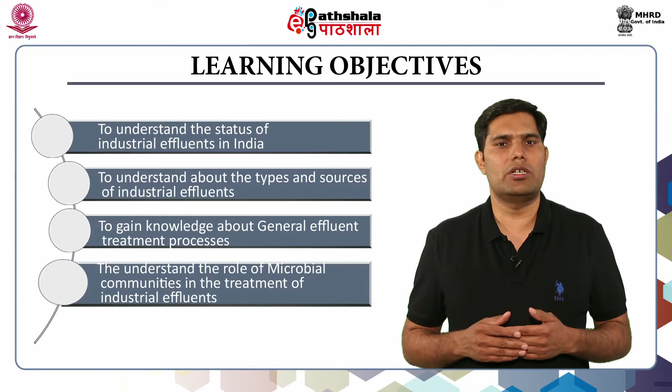Effluent or wastewater is polluted water that contains harmful liquid, solid or gaseous compounds, which may lead to contamination of surface or underground waters. It is estimated that in India about 13,500 million liters per day of industrial wastewater is produced, and only about 8,000 MLD is treated in existing effluent treatment systems. Hence, only 60% of effluent is processed and the remaining 40% is not processed due to lack of adequate effluent treatment facilities.

There is a large gap between the generation of effluent and its treatment. Remaining wastewater directly goes to natural water resources and causes negative effects to the ecosystem and human life.

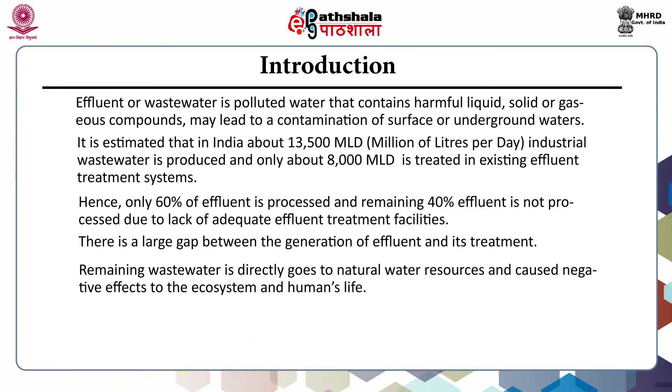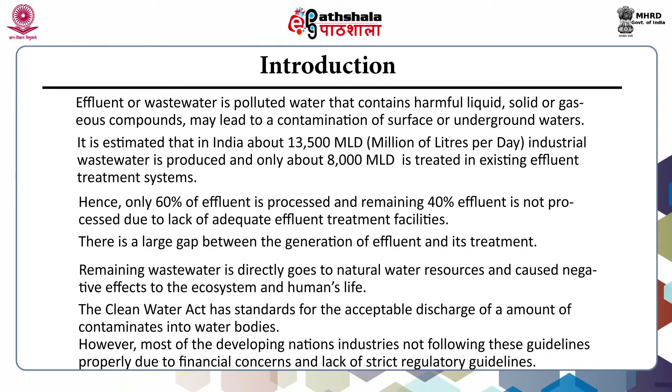The Clean Water Act has standards for the acceptable discharge amount of contaminants into water bodies. However, most developing nations' industries are not following these guidelines properly due to financial concerns and lack of strict regulatory guidelines.

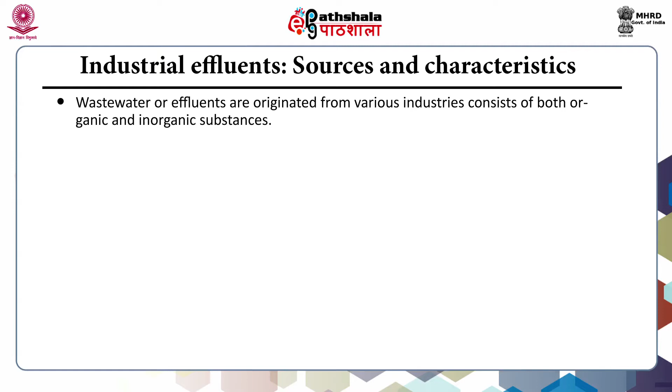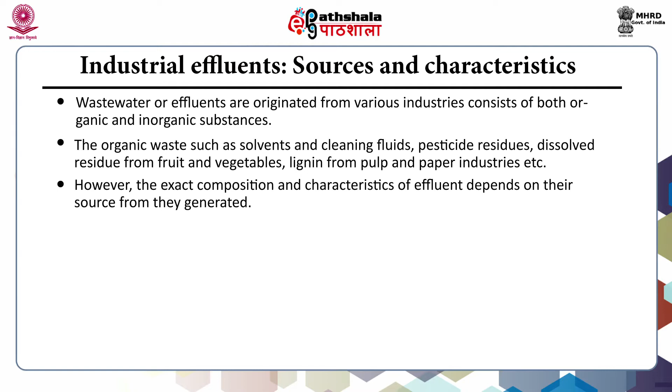Industrial effluents, sources and characteristics. Wastewater or effluents originate from various industries and consist of both organic and inorganic substances. The organic waste includes solvents and cleaning fluids, pesticide residues, dissolved residue from fruits and vegetables, lignin from pulp and paper industries, etc. However, the exact composition and characteristics of effluent depend on the sources from which they are generated.

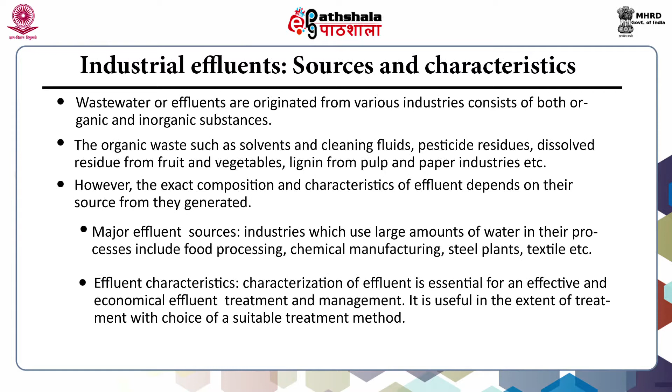Major effluent sources: industries which use large amounts of water in their processes include food processing, chemical manufacturing, steel plants, textile, etc. Effluent characteristics: characterization of effluent is essential for effective and economical effluent treatment and management. It is useful in determining the extent of treatment and the choice of a suitable treatment method.

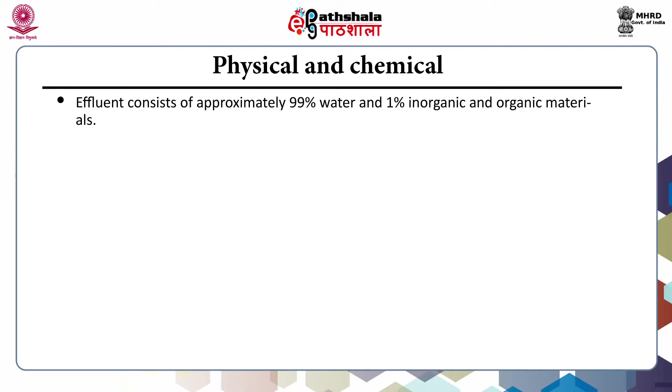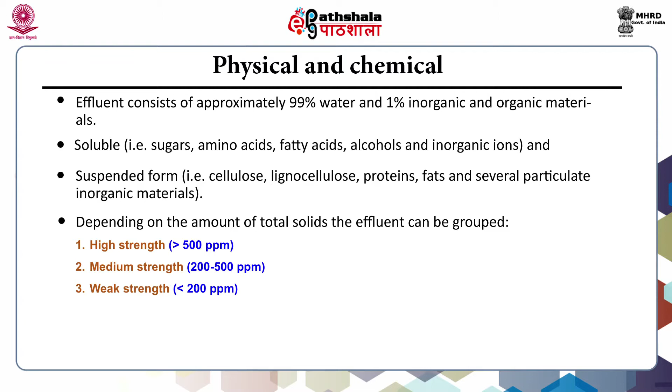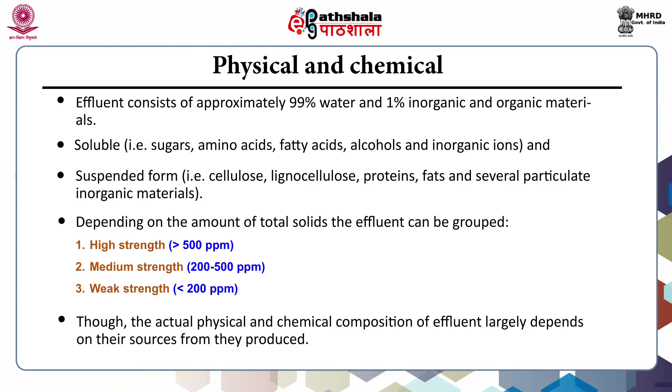Physical and chemical: effluent consists of approximately 99% water and 1% inorganic and organic materials. Soluble materials include sugar, amino acids, fatty acids, alcohol and inorganic ions, while suspended forms include cellulose, lignocellulose, proteins, fats and several particulate inorganic materials. Depending on the amount of total solids, effluent can be grouped as high strength (more than 500 ppm), medium strength (200 to 500 ppm), and weak strength (less than 200 ppm). Though, the actual physical and chemical composition of effluent largely depends on its source.

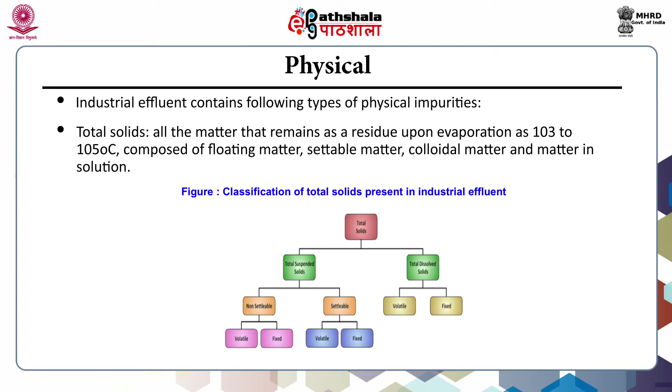Industrial effluent contains the following types of physical impurities: total solids, which are all matters that remain as residue upon evaporation at 103 to 105 degrees Celsius, composed of floating matter, settlable matter, colloidal matter and matter in solution. In this figure, you can see the classification of total solids present in industrial effluents. Total solids can be grouped into two groups: total suspended solids and total dissolved solids. Total dissolved solids are further divided into volatile and fixed; total suspended solids into non-settlable and settlable, which are further divided into volatile and fixed, and non-settlable into volatile and fixed.

Odor is due to either odorous compounds or compounds generated during the effluent treatment process. Temperature: the temperature of industrial wastewater is a very important factor since it affects aquatic life and can change the rate of chemical reactions or processes during treatment. Color varies according to the type of industry from where it is discharged. Turbidity indicates the quality of effluent discharge and natural water with respect to colloidal and residual suspended matter.

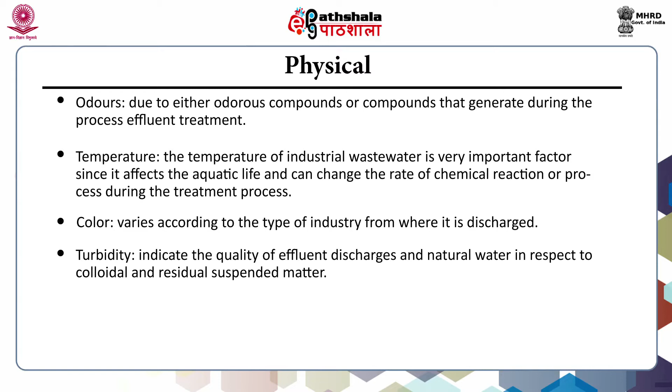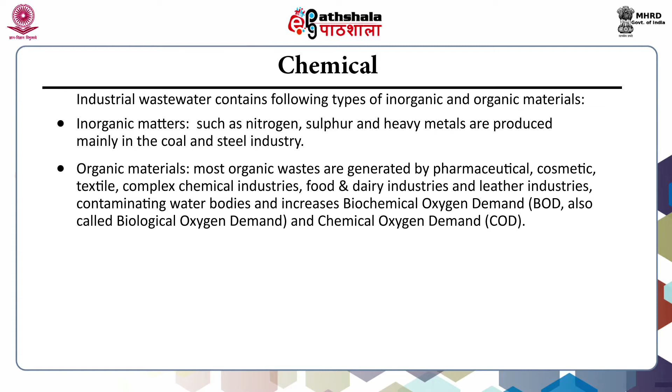Chemical: industrial wastewater contains the following types of inorganic and organic materials. Inorganic matter includes nitrogen, sulfur and heavy metals, which are produced mainly in the coal and steel industry. Organic material is mostly generated by pharmaceuticals, cosmetics, textile, complex chemical industries, food and dairy industries, and leather industries, contaminating water bodies and increasing biochemical oxygen demand, simply called BOD, and chemical oxygen demand, called COD.

Biological oxygen demand: the amount of dissolved oxygen needed by microorganisms for the aerobic breakdown of organic content present in effluent or wastewater at a certain temperature, that is 20 degrees Celsius, over a specific time period of 5 days. It can vary depending on temperature, nutrient concentration, and availability of enzymes in the indigenous microbial population.

The strength of wastewater is stated in terms of BOD level. A high value means that a high level of organic content is present, whereas a low value means that little oxidizable content is present. The BOD value is expressed in parts per million, that is ppm, of oxygen consumed by the effluent sample. The BOD can be used as a measure of the effectiveness of wastewater treatment plants.

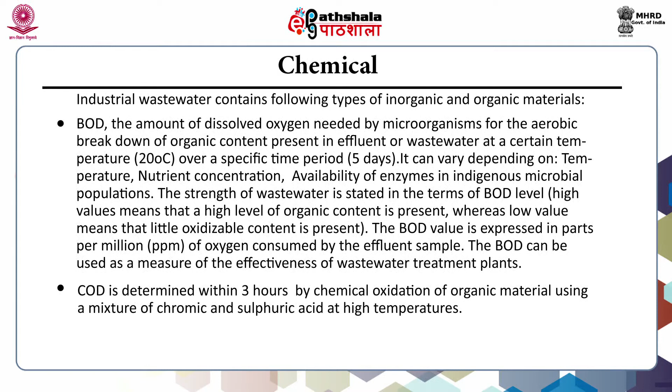Chemical oxygen demand is determined within 3 hours by chemical oxidation of organic material using a mixture of chromic and sulfuric acid at high temperatures.

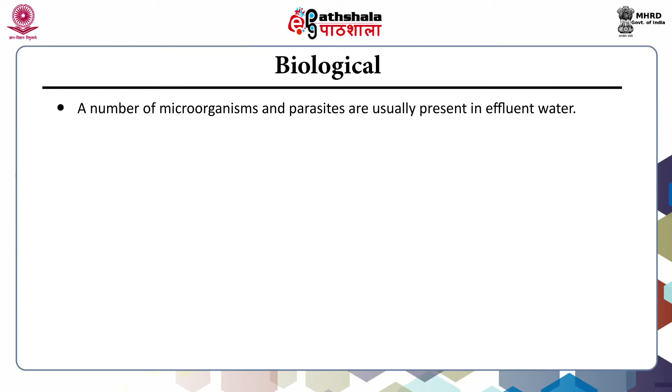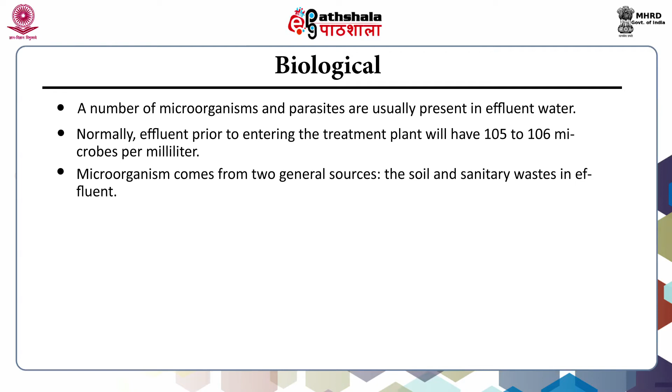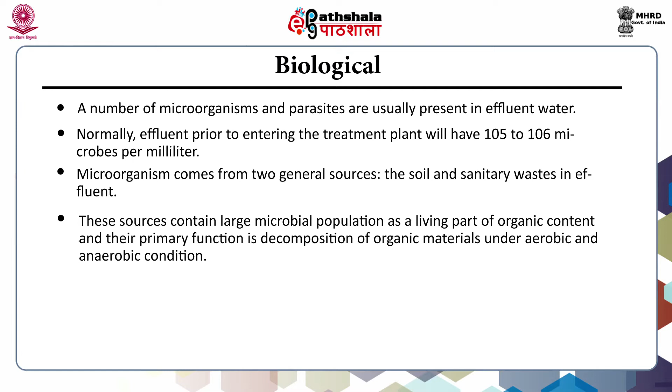Biological. A number of microorganisms and parasites are usually present in effluent water. Normally, effluent prior to entering the treatment plant will have 10⁵ to 10⁶ microbes per milliliter. Microorganisms come from two general sources, the soil and sanitary wastes in effluent. These sources contain large microbial populations as a living part of organic content, and their primary function is decomposition of organic material under aerobic and anaerobic conditions.

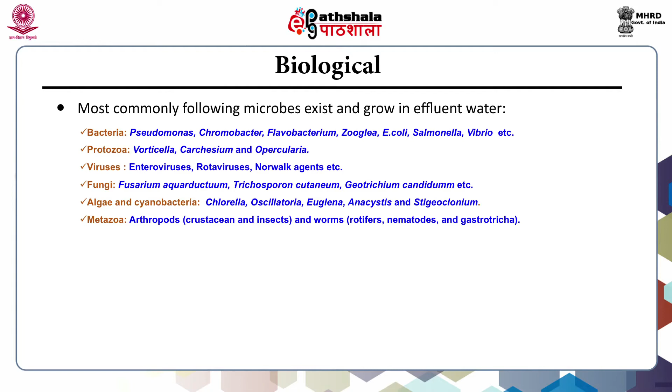Most commonly, the following microorganisms exist and grow in effluent water: bacteria including Pseudomonas, Chromobacter, Flavobacterium, Zooglea, E. coli, Salmonella, Vibrio, etc. Protozoa like Vorticella, Carchesium, Opercularia, and viruses: enteroviruses, rotaviruses, Norwalk agents, etc. Fungi: Fusarium, Trichosporon, Geotrichum, etc. Algae and cyanobacteria including Chlorella, Oscillatoria, Euglena, etc. Metazoa, arthropods and worms.

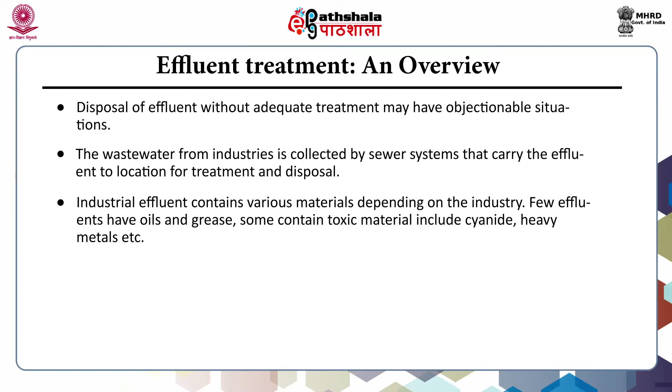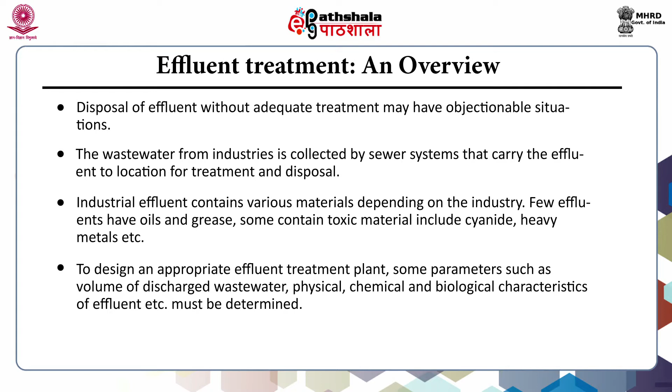Effluent treatment. An overview: disposal of effluent without adequate treatment may have objectionable situations. The wastewater from industries is collected by sewer systems to carry the effluent to a location for treatment and disposal. Industrial effluent contains various materials depending on the industry. Few effluents have oils and grease. Some contain toxic material including cyanide, heavy metals, etc. To design an appropriate effluent treatment plant, some parameters such as volume of discharged wastewater, and physical, chemical and biological characteristics of effluent must be determined.

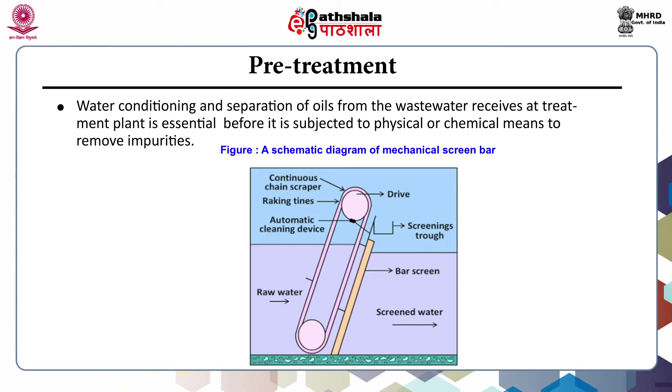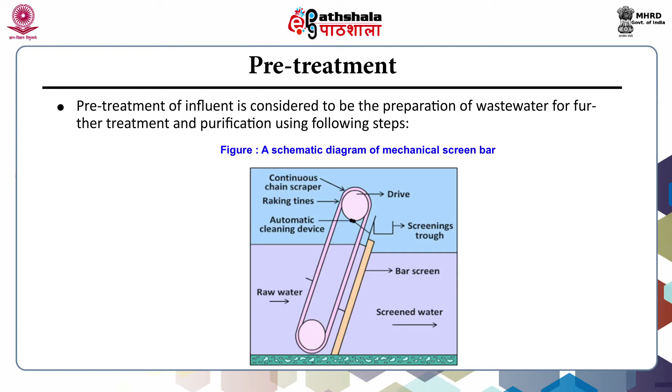Pre-treatment: water conditioning and separation of oils from the wastewater received at the treatment plant is essential before it is subjected to physical or chemical means to remove impurities. Pre-treatment of influent is considered to be the preparation of wastewater for further treatment and purification using the following steps. Screening, the first step, removes the largest solids like boxes, bottles, tires, cans, metals, etc. using screen bars.

Flow equalization, it is hydraulic flow equalization. The hydraulic velocity or flow rate of entering effluent is regulated in a flow equalization tank, which overcomes the operational problems that arise from flow variations and improves the performance of the treatment process at each stage. In this slide, you can also see a schematic diagram of a mechanical screen bar.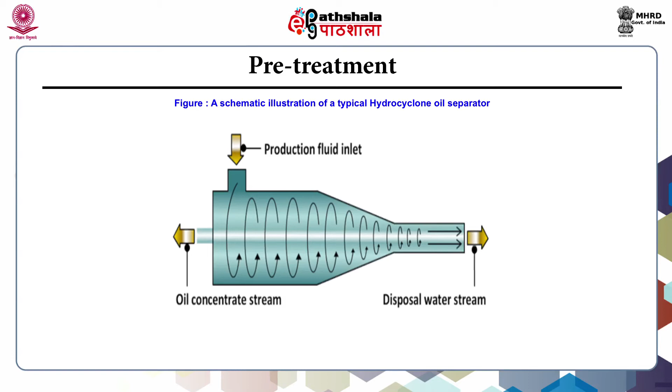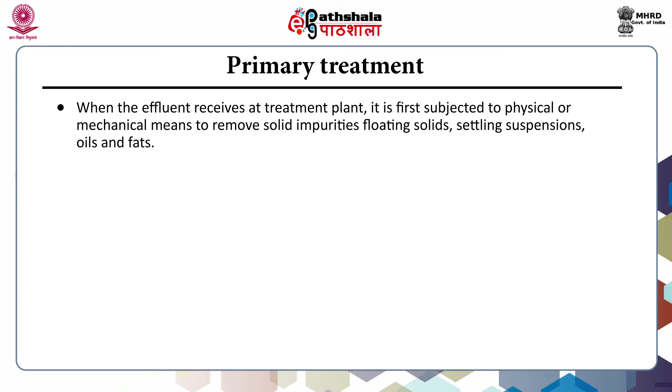Primary treatment. When the effluent is received at the treatment plant, it is first subjected to physical or mechanical means to remove solid impurities, floating solids, settling suspension, oils and fats. The effluent is passed through a series of filters of graded openings and then allowed to flow through a sedimentation unit. Impurities concentrated in and collected from sedimentation units are called sludge.

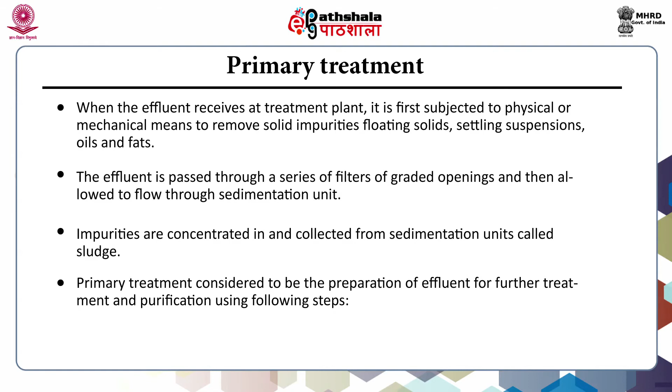Primary treatment is considered to be the preparation of effluent for further treatment and purification using the following steps. Chemical process: it neutralizes the pH and removes the chemical impurities by chemical precipitation.

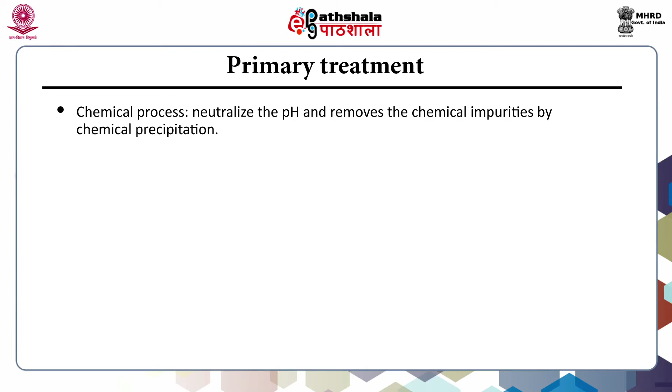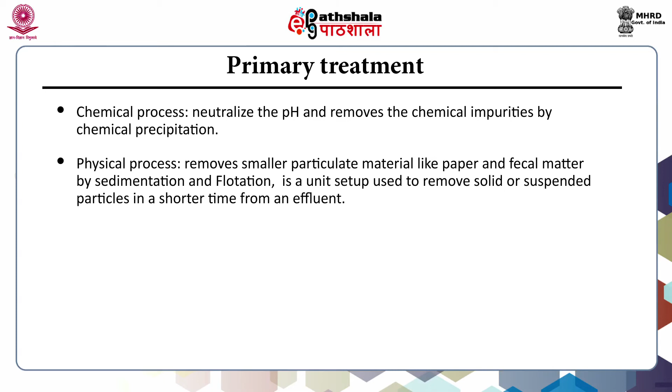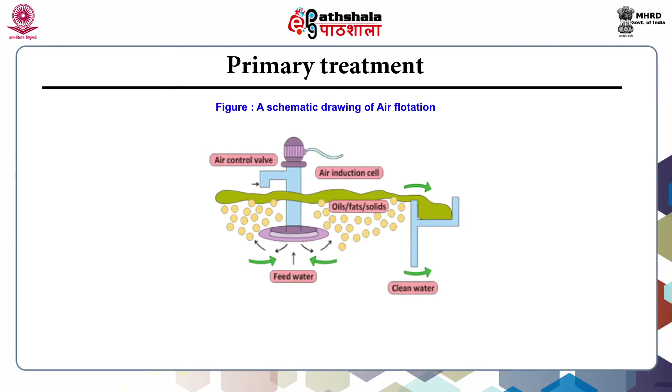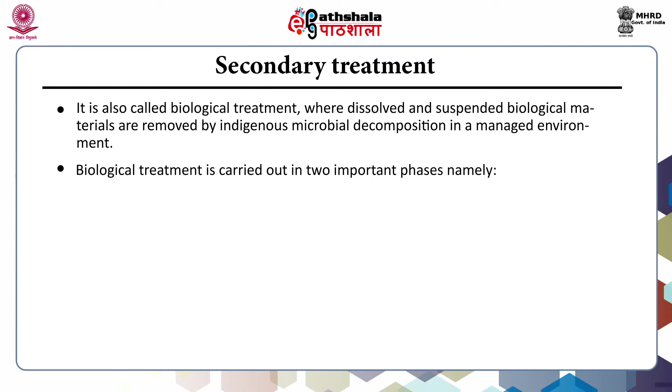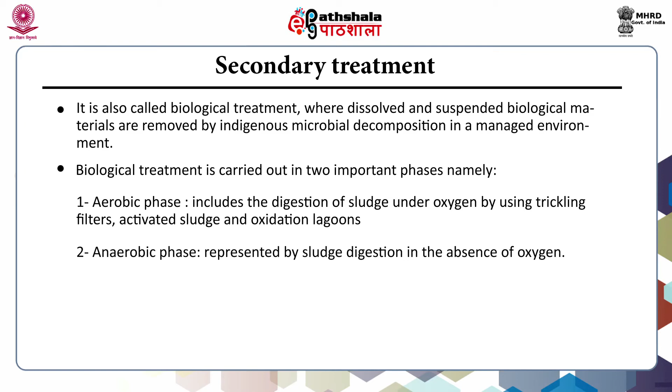Secondary treatment. It is also called biological treatment, where dissolved and suspended biological materials are removed by indigenous microbial decomposition in a managed environment. Biological treatment is carried out in two important phases, namely aerobic phase. It includes the digestion of sludge under oxygen by using trickling filters, activated sludge and oxidation lagoons. Second, anaerobic phase. It is represented by sludge digestion in absence of oxygen.

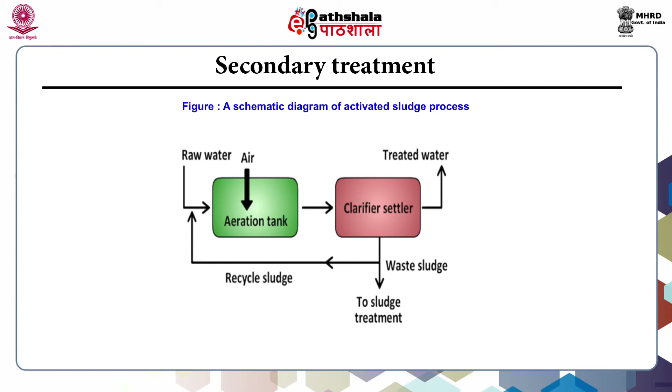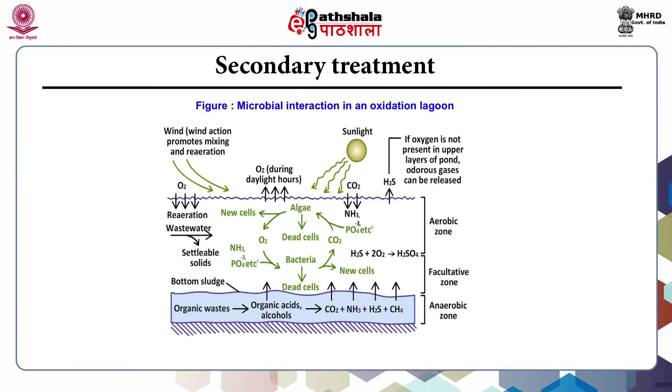Tertiary treatment. It is an advanced and final step of effluent treatment and is also called chemical treatment. The main objective of tertiary treatment is to provide final treatment to further improve the effluent quality before it is released to ground, wetlands, sea, river, etc. Following steps are included in tertiary treatment.

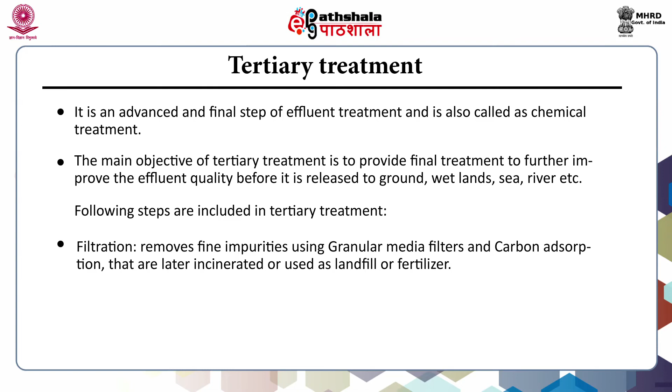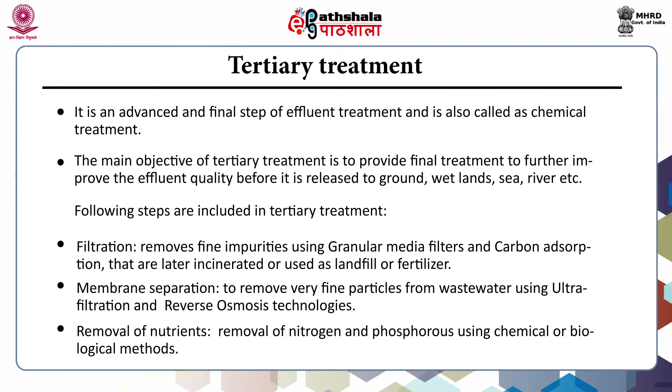Filtration removes fine impurities using granular media filters and carbon adsorption that are later incinerated or used as landfill or fertilizer. Membrane separation, to remove very fine particles from wastewater using ultrafiltration and reverse osmosis technologies. Removal of nutrients, removal of nitrogen and phosphorus using chemical or biological methods.

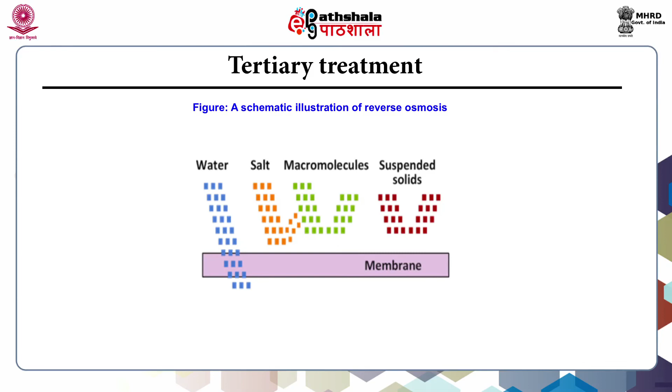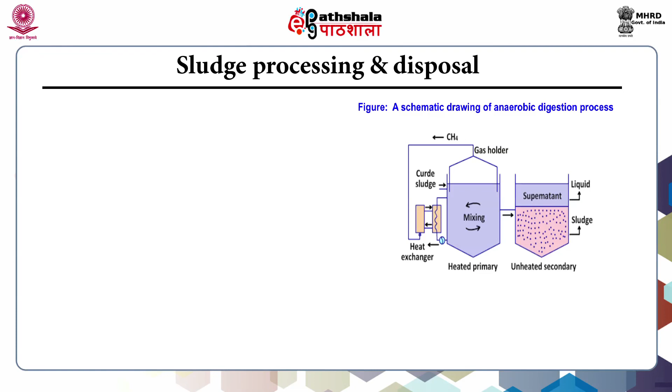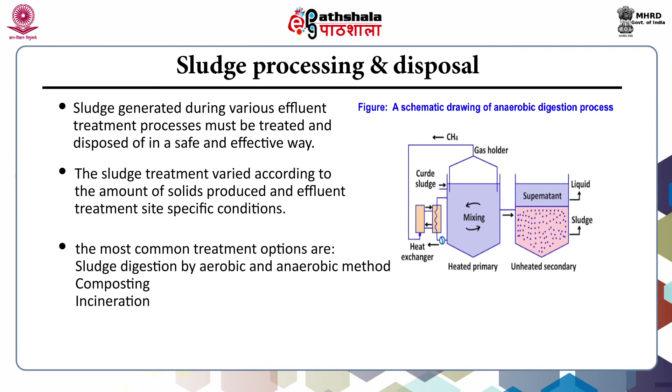Let us summarize. Effluent treatment is a process of removing physical, chemical and biological contaminants from wastewater. Effluent treatment consists of 4 stages: pre-treatment, where water conditioning and separation of oils is performed; primary treatment, pH adjustment, physical removal of coarse solids, about 30% removal of BOD and 60% removal of total suspended solids achieved in this step.

Secondary treatment, it includes decomposition and reduction of organic content as well as total dissolved solid, total suspended solid ranging from 25 to 30 ppm by biological activities and reduction in BOD levels and TSS not less than 85%, pH between 6 and 9, and tertiary treatment includes advanced treatment, removal of BOD and TSS to less than 9 ppm or removal of over 95% of BOD and TSS.

Disinfected and clarified wastewater is discharged into nearby natural water bodies. Sometimes treated water may be used for drinking purposes by using recent advanced treatment technologies that include membrane filtration, ultrafiltration and reverse osmosis technologies. Sludge may be used in crop fields as fertilizer, or incinerated or landfilled if it contains toxic chemicals.